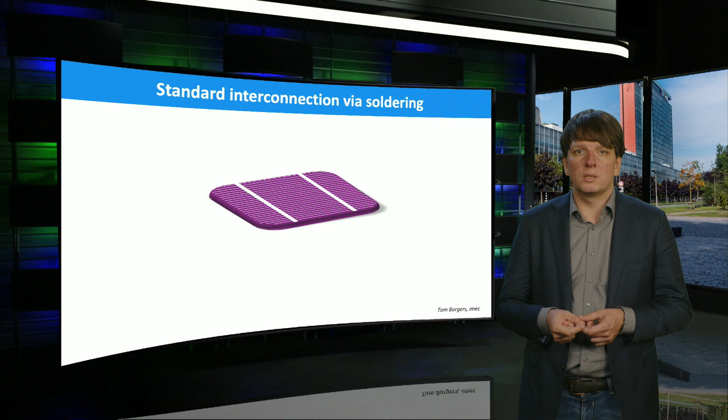Let us recap the most common method of interconnecting solar cells within a module. Our example starts with a single solar cell. Coated copper ribbons are then soldered to the front side busbars of the solar cell. The ribbons are then soldered to the rear side contacts of the next solar cell.

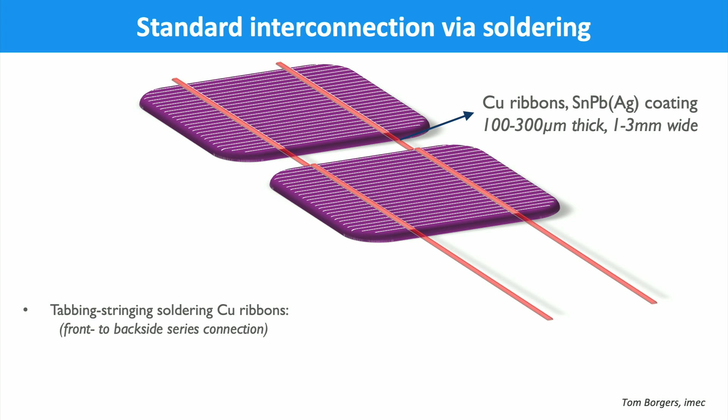Then the process is repeated by soldering the ribbons to the front side contacts of the next set of solar cells. For the soldering to work, the ribbons need to be coated with lead, which is a toxic element which we would like to avoid using from an environmental impact perspective.

One lead-free alternative is using electrically conductive adhesives, or ECAs in short. ECAs consist of a polymer adhesive matrix which holds the contacts together. This polymer matrix is filled with conductive particles to provide sufficient electrical conductivity.

Advantages include a low process temperature and the lead-free nature of the ECAs. One disadvantage is a higher silver consumption compared to traditional soldering methods. Conductive adhesives can be applied to many types of different solar cells, including Al-BSF, PERC, silicon heterojunction, IBC, MWT, and busbarless cells.

ECAs can also be used with various kinds of interconnection technologies, including shingling and back contact solar cells with conductive backsheets.

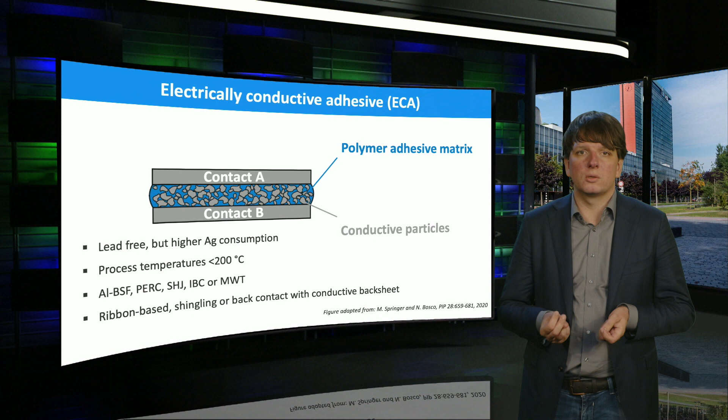A mechanical pressure module replaces the typical EVA encapsulation with a natural gas. This gas has a lower pressure than the environment. To keep this underpressure, the edge of the module needs to have an airtight seal, which is adopted from insulating glass technologies. This module type is also known under the name of NICE module, which stands for New Industrial Solar Cell Encapsulation.

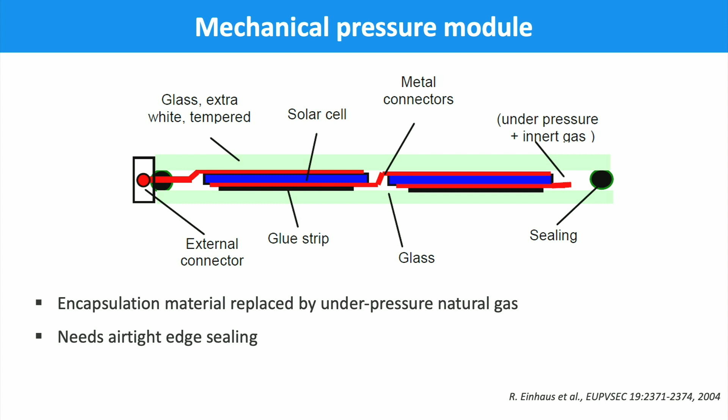The fabrication process starts with glue deposition on the rear glass or backsheet of the module. Second, the solar cells and metal connectors are placed on the glue. Next, the external connector is positioned, and in the fourth step, the deposition of the edge sealing material on the front glass or front sheet is done.

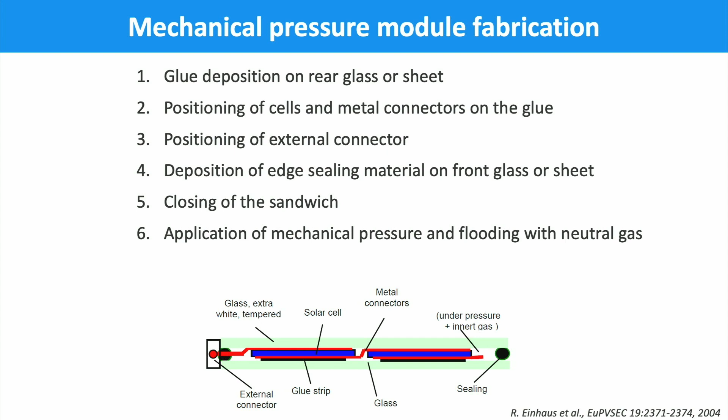The fifth step contains closing the material sandwich, and during the sixth step we apply a mechanical pressure to the front and rear of the module while the module is flooded with neutral gas, which creates an underpressure of approximately 200 millibars inside the module.

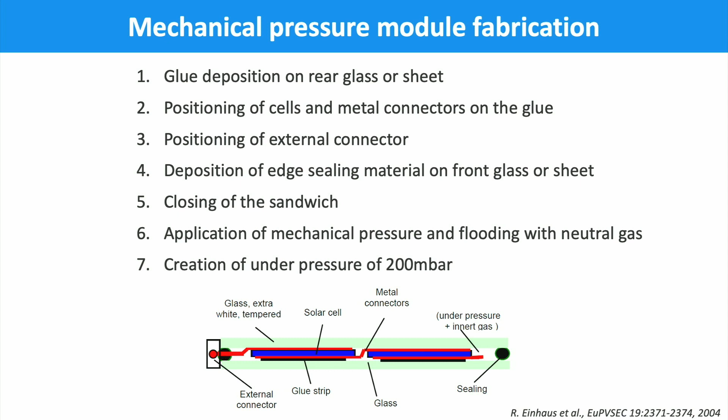This module type has advantages and disadvantages. Optically, it has the advantage of the gas having virtually no absorption. However, the gas has a different refractive index, which increases reflection at the inner side of the glass. This can partially be resolved by applying an anti-reflection coating on both glass surfaces. Similarly, the cell anti-reflection coating needs to be adjusted to the different refractive index of the gas encapsulation.

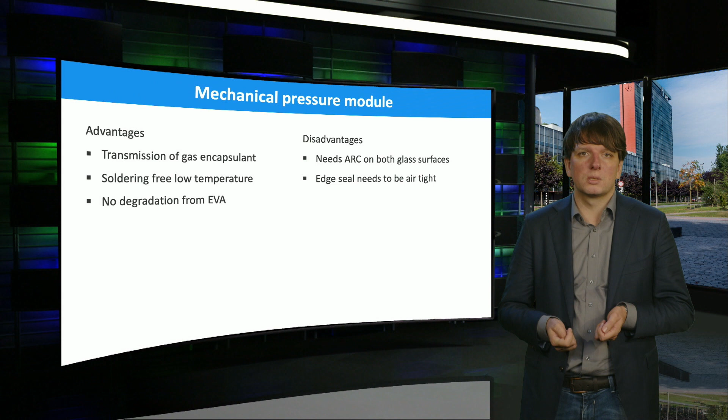As for ECAs, the soldering-free and low-temperature fabrication is a major advantage. This also lowers the environmental impact of the technology. Due to not having EVA, various degradation modes related to EVA, such as browning or PID, are also not present in these modules. However, the edge seal needs to remain airtight for the whole lifetime. Not having laminated encapsulation also improves the recyclability of these modules as the materials are easier to separate.

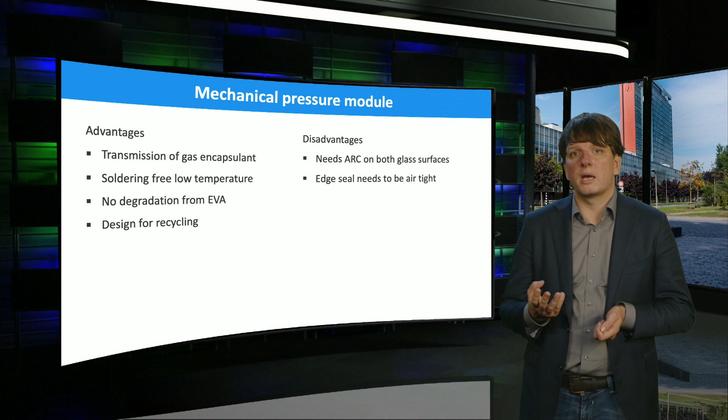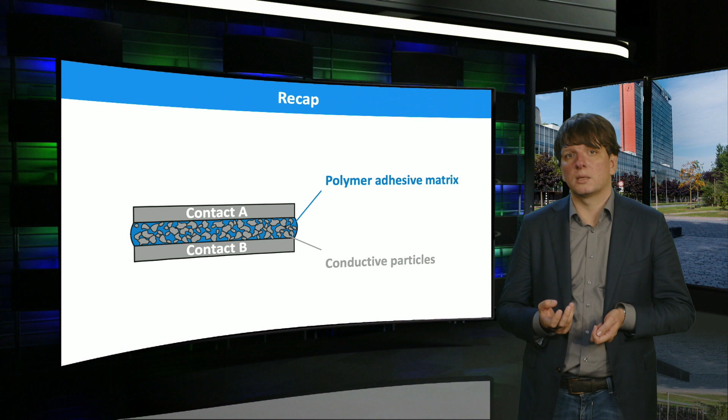To recap this lecture, we discussed two soldering-free approaches to interconnecting the solar cells in the PV module. First, electrically conductive adhesives, which consist of a polymer adhesive matrix filled with conductive particles. The second approach is mechanical pressure or NICE modules. These modules replace the typical encapsulation material with a neutral gas with an underpressure. This approach increases reliability and recyclability of PV modules, but requires glass with ARCs on both sides.